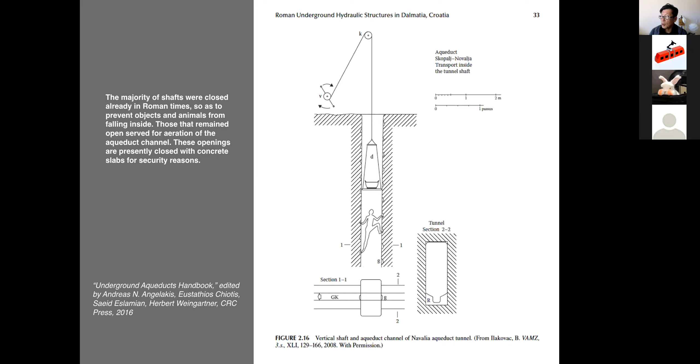Okay. And then again, on the bottom right side is a section of the tunnel. I have no idea why. I can't find the mouse. This is a problem of different applications, Apple's Keynote and Zoom, not working together yet.

So you can see the section where the letter R is, the section that I would imagine maybe was made of stone, cut into what looks like a kind of U shape, letter U, which channels the water. The angled view at both left and right sides is to kind of contain the water, and then the U section at the bottom is where the water flows, giving it more dynamic force.

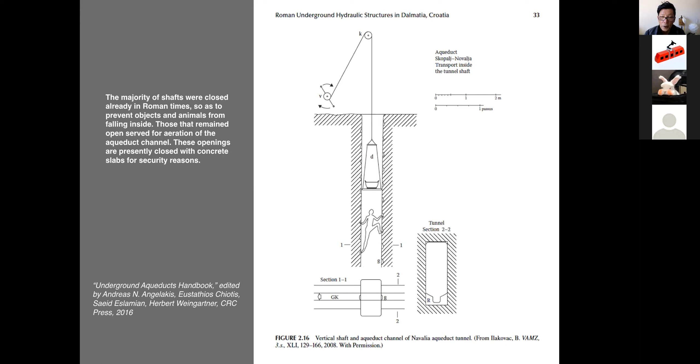And this is very typical. If you see the storm drainage in the Los Angeles area, like the LA River, for example, a giant canal made out of concrete, you see in the middle of it what looks like a little channel to further help drain the water, or to capture water into a more concentrated line, shall I say.

So again, sometimes the tunnels did have staircases. As you saw in Mr. Valentino's presentation, an old well underneath a current building that has been hidden or destroyed. People used to walk down stairs to the well to get water.

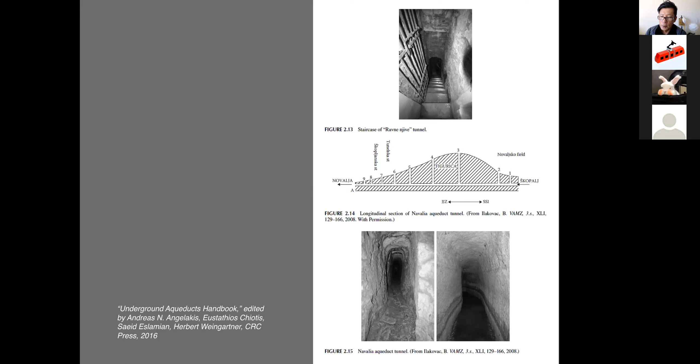Here's another section in the middle showing the same thing. The top curvature is the elevation of the land, and the horizontal line that looks like a tunnel is where the water flows, and all the vertical holes through the land are the shafts for moving materials and people, and giving air up and down the underground aqueduct tunnel.

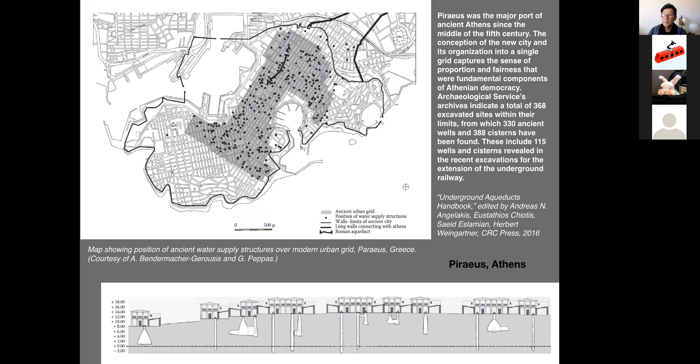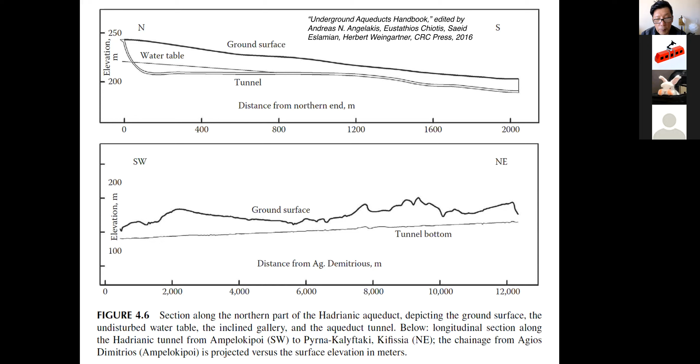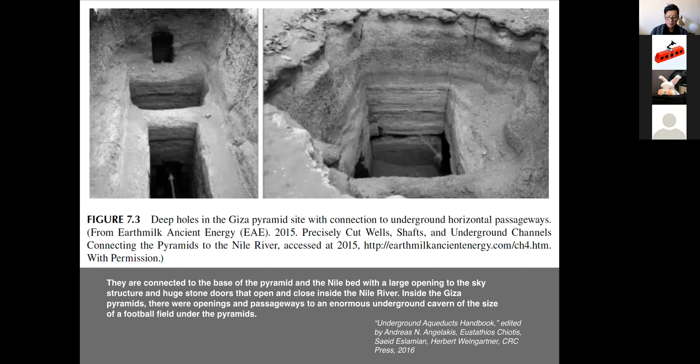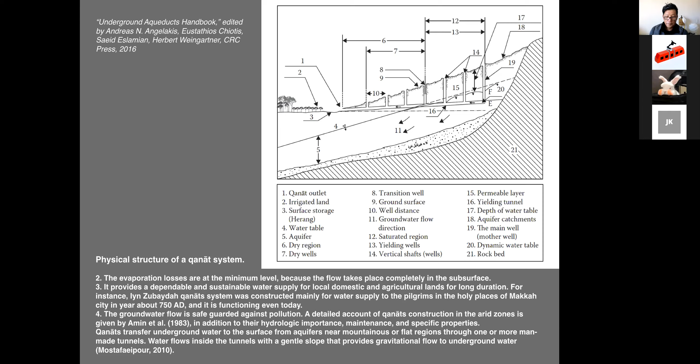And as you can see in this picture, in Iran, people built a tremendous amount of these Qanat systems. In fact, in Afghanistan, they say that there may be more than 30,000 kilometers, which would be about 20,000 miles, and maybe more than tens of thousands of Qanats in Afghanistan, with varying length.

Most of them are less than, let's say, 5 miles long, but some could be hundreds of miles long. And it's almost like a road system that we use today, except these are not to transport cars or us, but to transport water from one place to another. As you can see in this image, it is basically running under an agricultural field. So the water was used for that exact purpose. Otherwise, you can grow nothing here, especially in arid environments like in Iran.

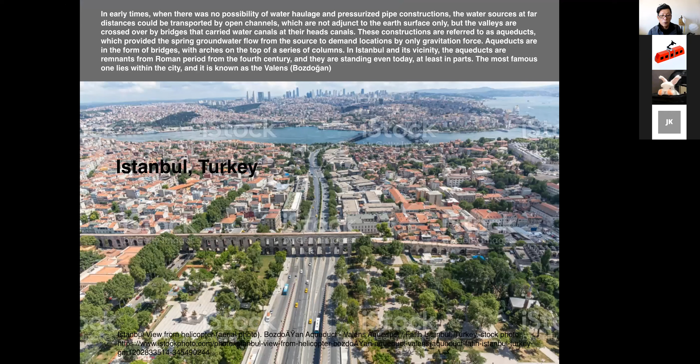And so these are tremendous constructions. The first one was built by the Roman Empire. This one is called the Aqueduct of Valens, which suggests the Roman Empire, but that's the wrong title. This aqueduct, I mean, this bridge, was completely built by the Ottoman Empire.

So you could imagine maybe in Napoli or in Seoul, South Korea, there are two sites of your projects, in which in the second half, before you begin to design, you will actually get images of the site. I will give you the exact site to work on. You could imagine maybe something like this could be built there.

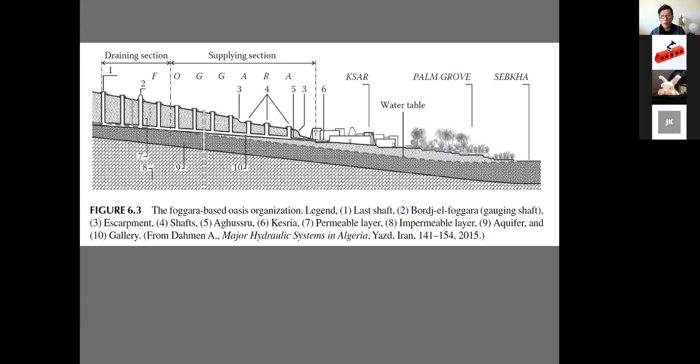The last picture that I want to show you for you to think about is what I mean by the wind tower. This may end up being the starting picture of my next lecture. You see the qanat system that takes water from one place to another at the bottom. And then the shaft that was used to access the tunnel, to build the tunnel, to maintain the tunnel, is also a way that hot air gets pulled down by natural circulation, where hot air moves toward the cold air, or cold air moves, maybe they do both. I don't know. I'm not an expert on that. That's what you need to research.

So the hot air above the ground, in an arid climate like in Iran, is pulled down by the cold temperature underground. It goes down to the qanat, and as it moves along the cold water underground, the air gets cooled. Then it's brought up to a basement that captures this cold air, kind of like a cistern that captures water. And then in the Islamic world, like in Iran, you see a lot of old buildings and houses with towers built into them that rise very high. The reason for that is that it pulls air from the ground up and takes it out of the building.